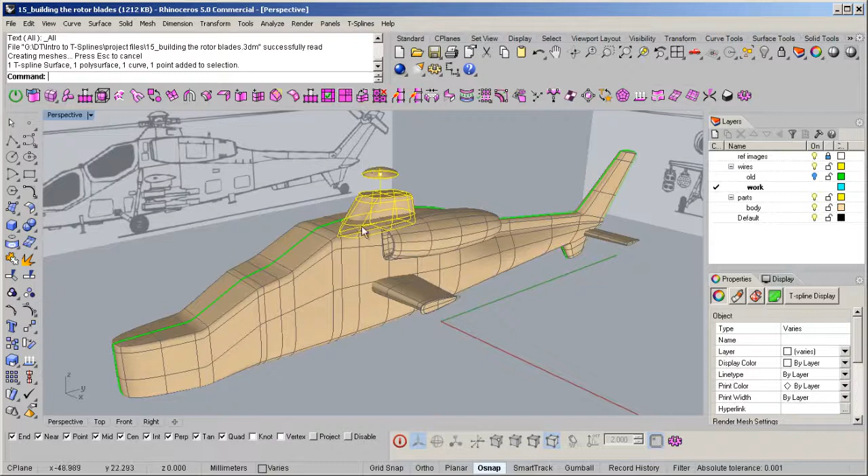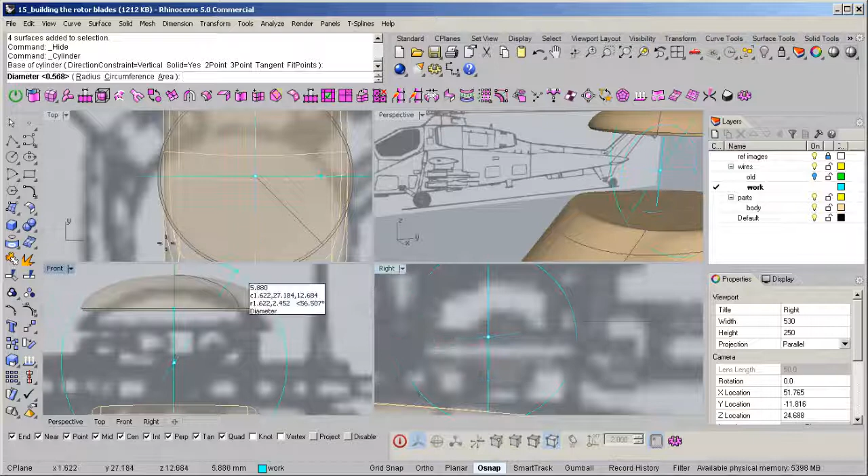I'm going to draw a cylinder, snap to this curve here. I'm going to draw it about the width of this disc, that's about right, and give it a little bit of height. I'm going to use the gumball and pull it down.

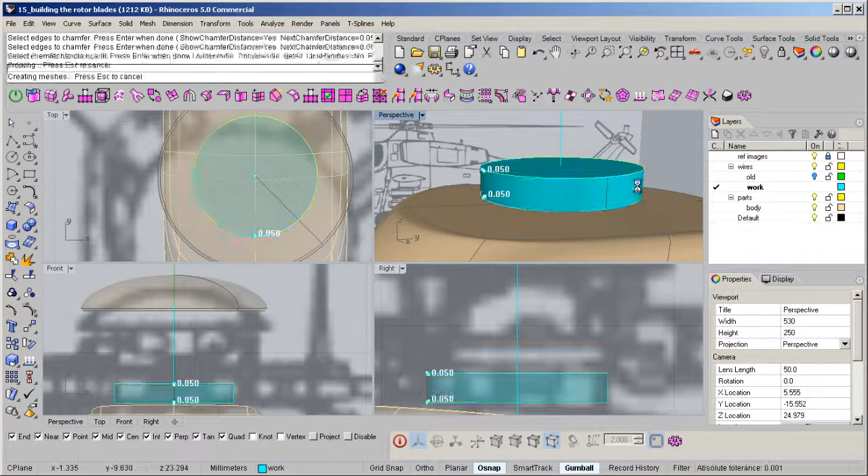Let's add some chamfer. Let's go with 0.05 and select these two edges. I think that looks good.

Switch over to this curve here and let's pipe it. I'm going to go this thick, that's about right. And we can scale it down and move it up. There we go.

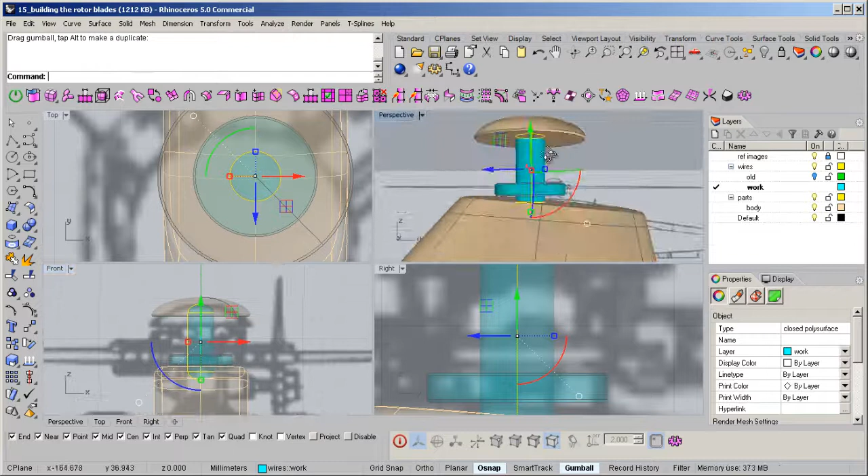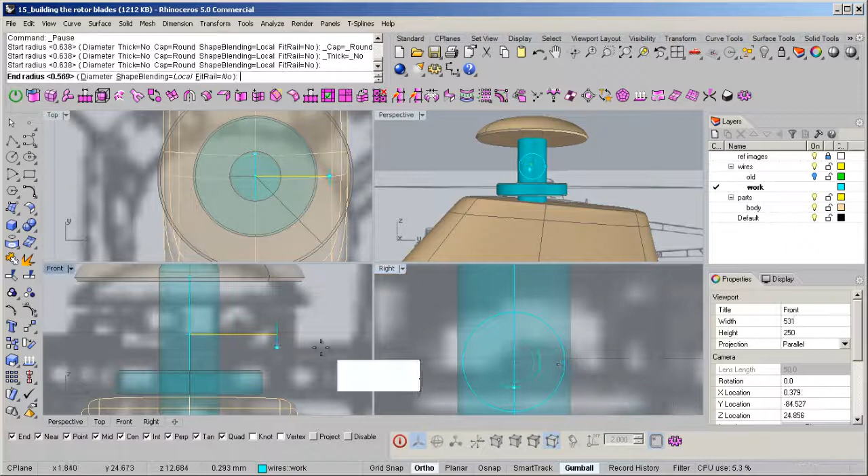I'll draw a line snapping to the curve here and pull it out. Let's pipe it. I don't want it wider than this cylinder, so I'm going to draw it within its boundary. There we go, and right click. There we go.

Let's go ahead and draw a rectangle from center, snap to the end here, and pull it out. Go a little smaller. That looks good.

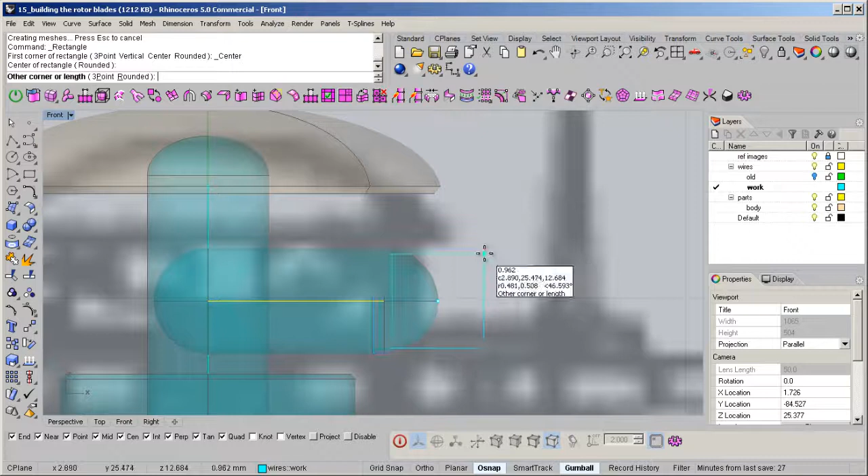Use the gumball scale and hold the shift key so you go in. Make sure when you're scaling it, you hold the shift key, and when you get to a certain distance, just tap the alt key to make a copy.

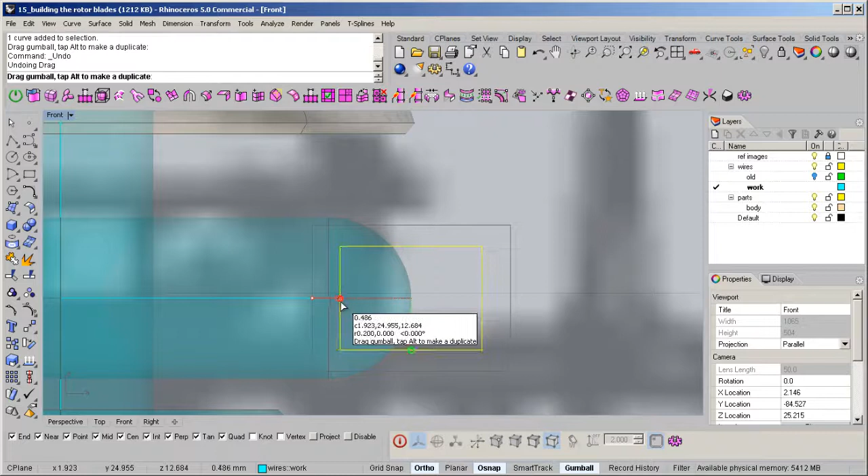Now we can go here and scale it into place and pull it out. There we go, kind of get an even distance. Select both curves and let's trim it.

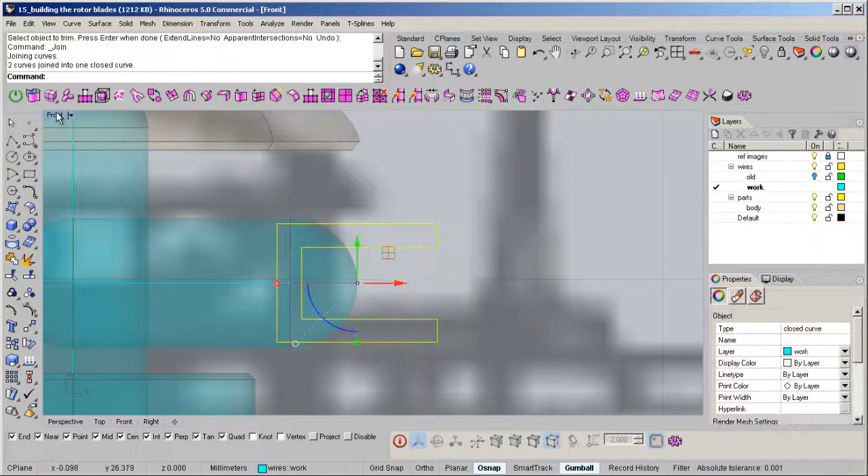Let's extrude it a little wider, and we can cap it. We don't want this area in here, so we can do a Boolean difference with no. There we go.

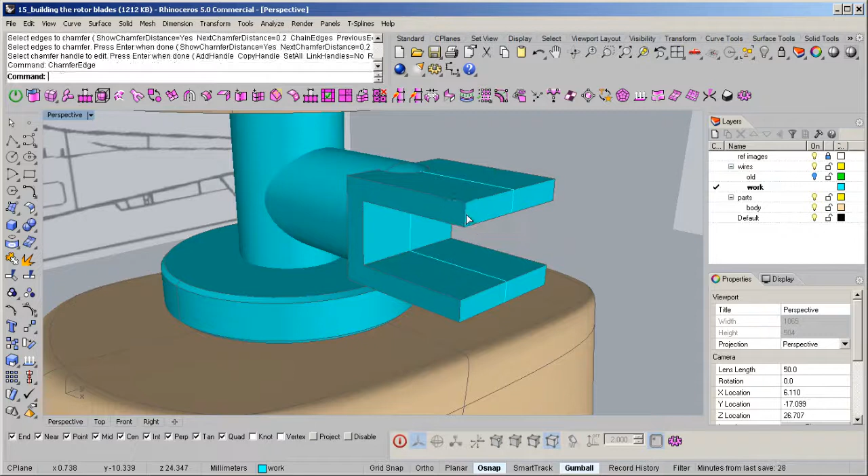Let's round off these. Actually, let's do a chamfer. We'll go with 0.2 and see what happens. I'm going to go with more, I'm going to go with 0.4. There we go. So we can select all of these corners here.

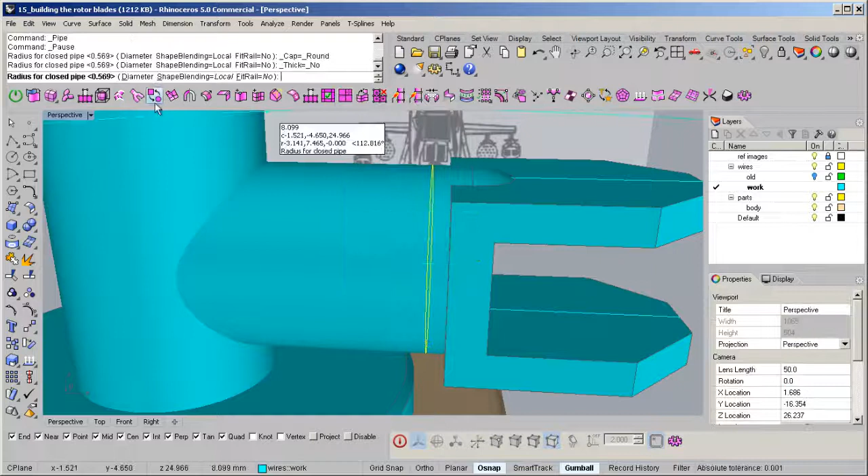I'm going to extract an isocurve this direction, right about to here. I'm going to pipe it, we'll do it by eye. That's a good width.

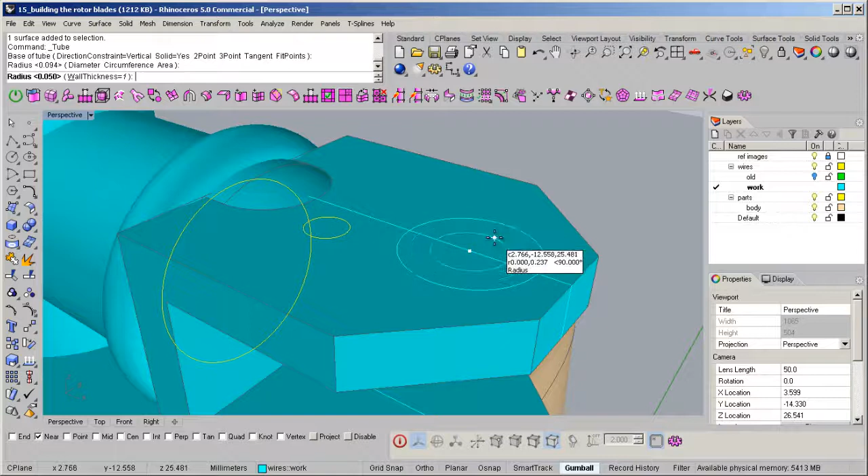Let's go ahead and draw a cylinder, an open cylinder, and let's just snap it to this curve here. Give it a little bit of thickness and pull it out just a tiny bit. All right.

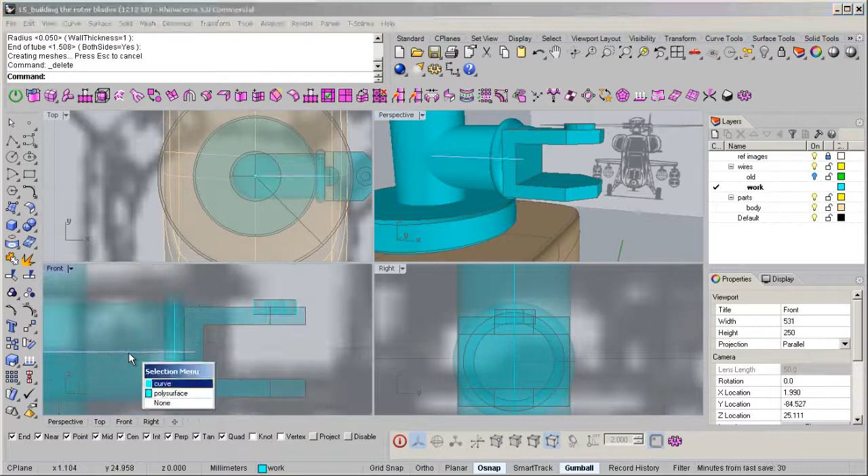I'm going to right click so everything is back. Got to make sure we select this curve here and let's pull it out so we have something to snap to. And let's draw a point right at the end here. That's good.

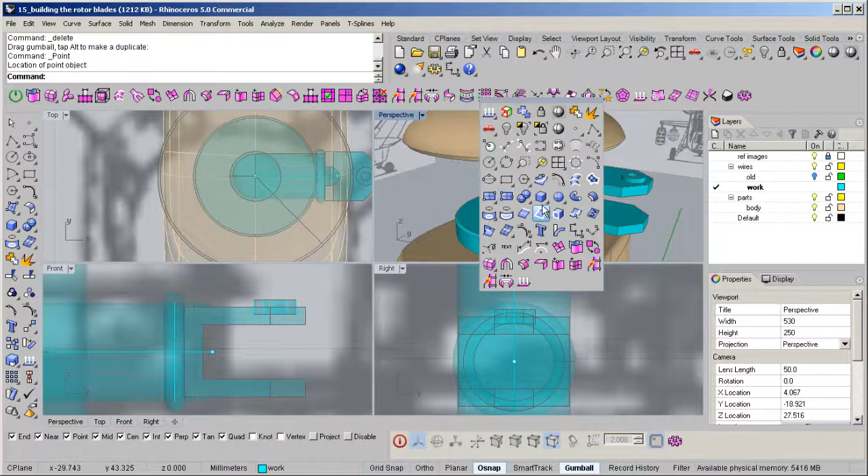Let's go and draw a box from center, we'll snap to this curve here, make a thin rectangle, go in this direction. Let's pull it out right about to here. Slide it back.

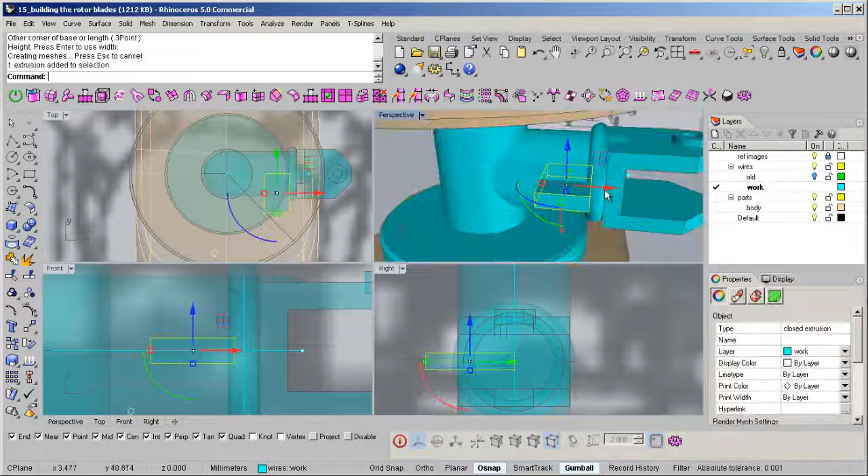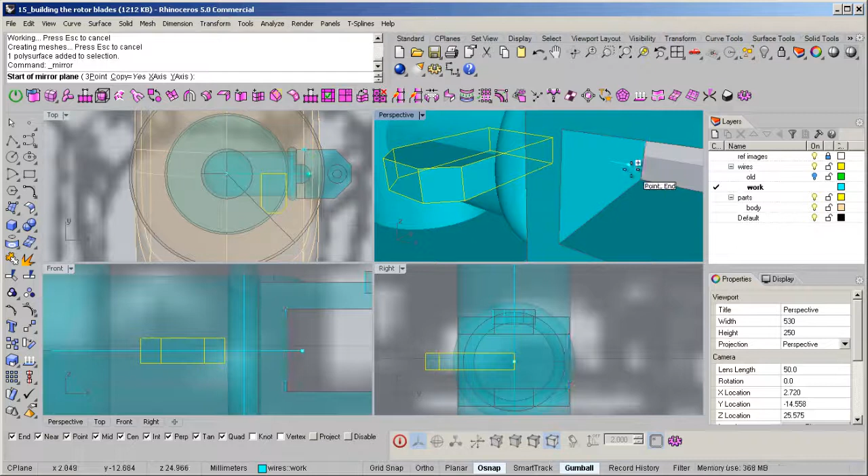Do a chamfer. Let's go with 0.4, it's a little too much, so let's try 0.15. That's perfect. I want to mirror it to this point, and you want to get on both sides.

I'm going to union it to the cylinder and do the same for the other one. Let's union these together.

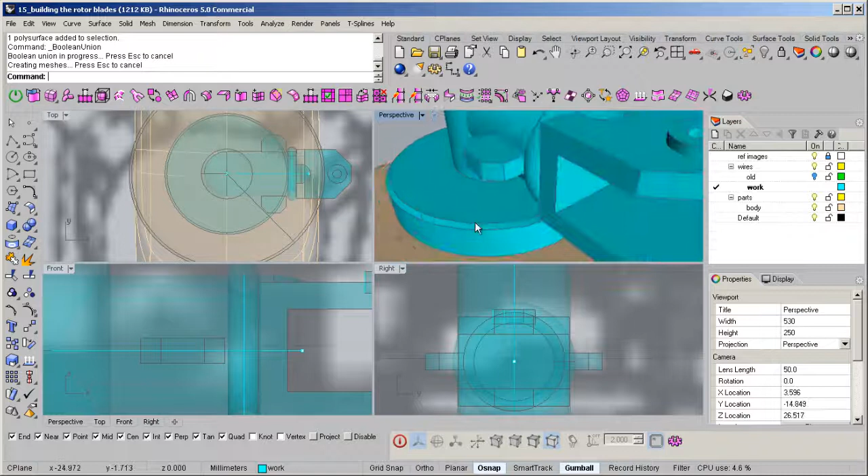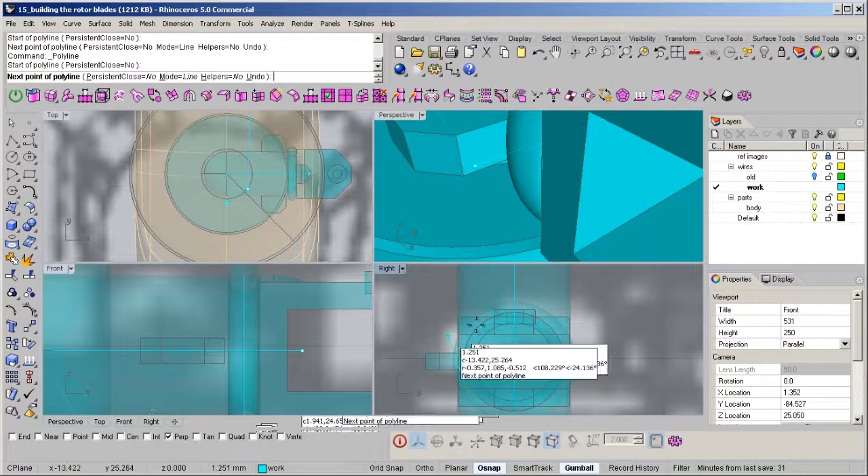And I want to do a NURB reference line, so I'm going to draw one from here, this at near, find its perp. You could right click on the word perp. There we go.

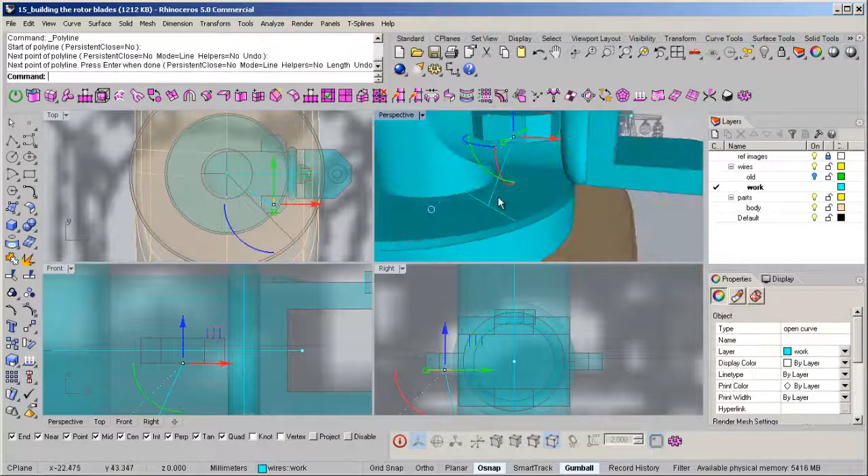Draw an isocurve right at the bottom here, find its mid. You could draw a curve from the middle of that line to the middle of this line. And let's pipe it, we'll go with a thickness of 0.1. Perfect.

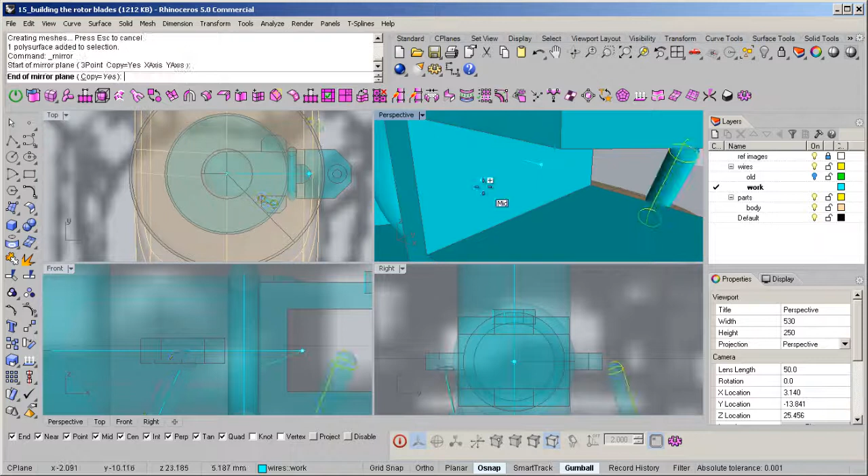Let's take it and mirror it from that point. Hold the shift key so it's mirrored to the other side.

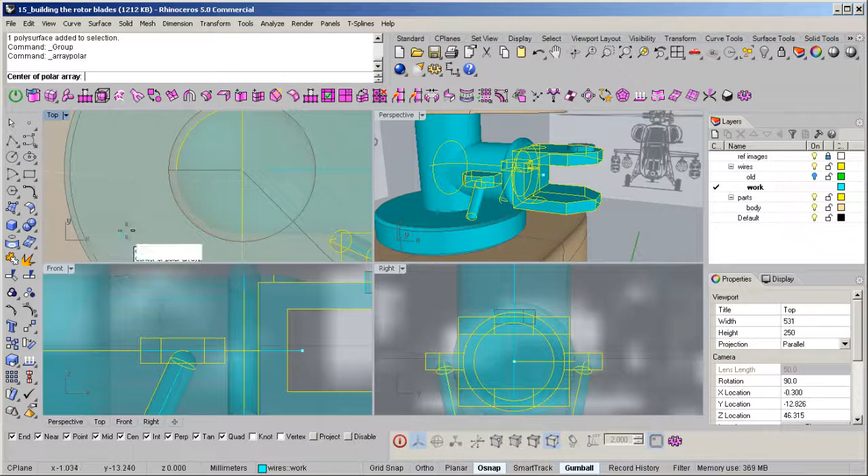Great, let's see what happens when we take all of these. Let's group it and do a polar array from the center of this disk. There we go, let's go 4 times.

Make sure they don't intersect. Looks like it's barely hitting, which is perfect. Actually, it looks good, it's nice and simple.

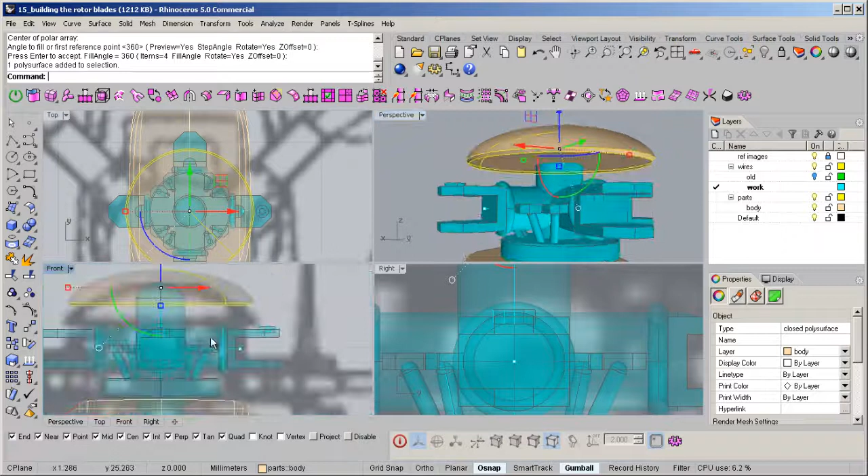We'll take this disk here because it has a little too much height, and I'm going to pull it down right about to there. Make sure this is not poking, so I'm going to take this cylinder, do a Boolean difference, and we can get rid of that dome.

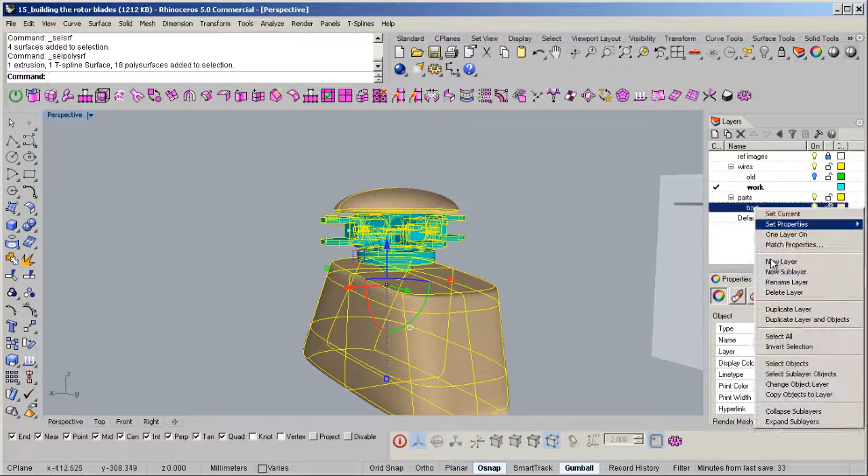Select the surfaces and right click so it's part of the body. I'm actually quite happy with it. So in the next lesson, we're going to build the blades for the rotor.